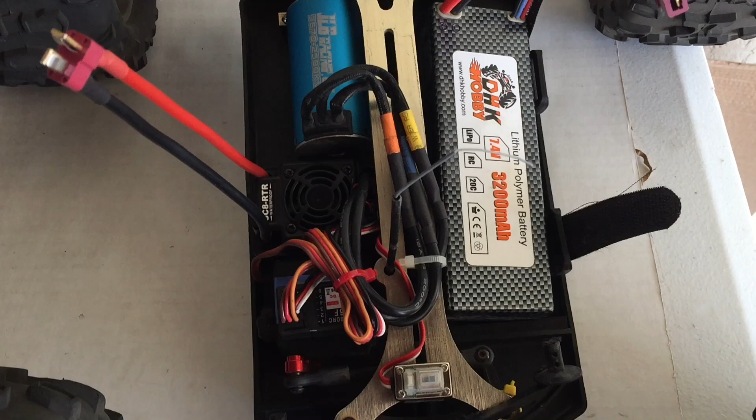So in my previous video I showed you guys how to calibrate and get started with the SC8 ready to run 120A ESC, and in today's video I'm going to show you guys how to reprogram it to your personal preference or the desired settings that you want.

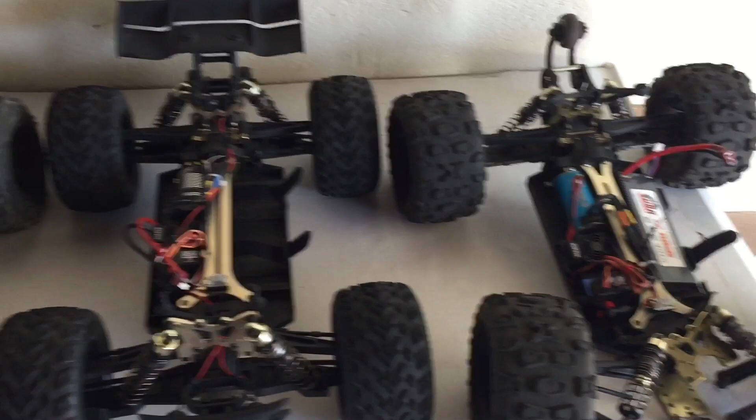Alright, so if you notice, all three of my trucks have the EZRUN SC8 ready to run 120A ESC. That one has it. I recently got one for the Generation 1. The DHK Maximus originally comes with it. That one's already reprogrammed, that one's already reprogrammed, and this one needs to be reprogrammed. So I'm going to show you guys how to do that, and I'm going to clear the table so we can just focus on that ESC right there.

Now the only time you don't need to recalibrate this is when you buy a ready to run kit. For example, you get the truck, the battery, the controller. The factory already calibrates it for you, so it falls under the term ready to run. But since you're getting this as a replacement part like I did, you're gonna have to calibrate it yourself. And if you guys want to know how to do that, check out my previous video. I show you just how to do that. So today's video we're gonna be reprogramming.

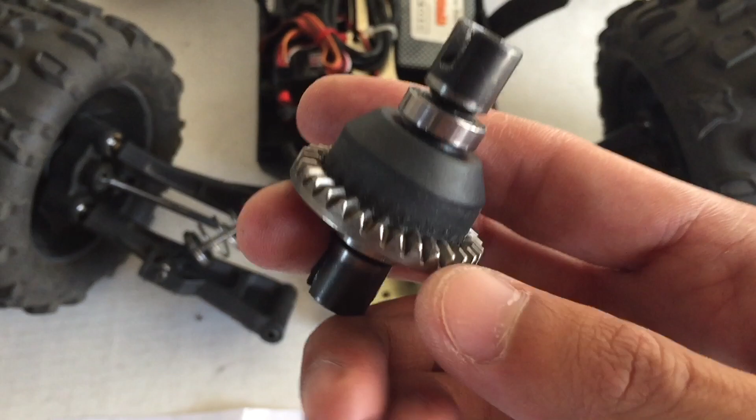And what's going on with my JLB Cheetah is that I'm getting a new front diff because the crown gear on here is really bad. Some of the teeth are grinded down really bad. Check that out. So this needs a new front diff, and also the pinion gear in the diff housing is also grinded down. If you notice there, the tooth comes all the way to the edge and it's basically eaten up. And also one of the bearings here popped.

It's supposed to have two bearings, so it started wobbling in the diff housing, making a bunch of crunching noise. And also the drive shaft cup is completely destroyed. So I'm getting this whole unit new. It should take about a month and a half to get here because of the whole COVID situation and how customs are handling their procedure. It's taking some time. So yeah, let's go on with reprogramming the ESC.

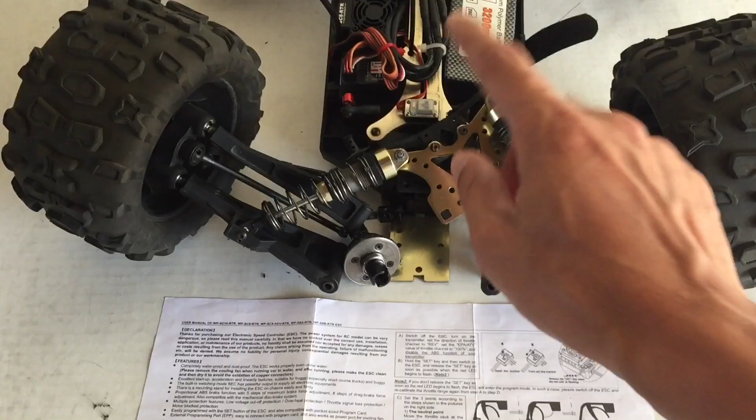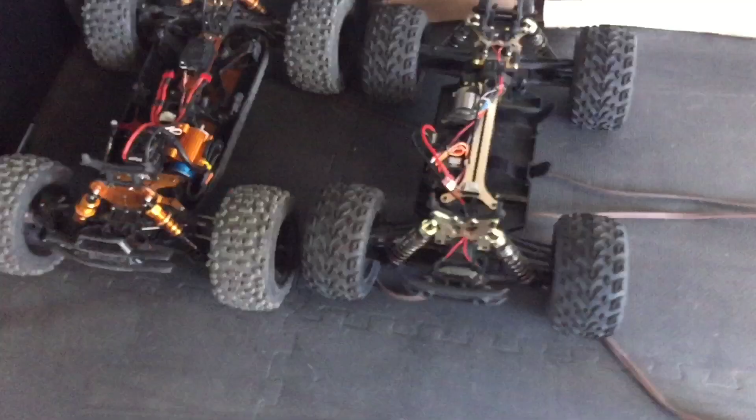Alright, so first things first, you want to learn a basic knowledge of what the spec sheet is trying to tell you. But I'm gonna explain to you guys to the best of my knowledge how I did it with those two trucks down there. I'll try to make it fast and easy. So these here are your categories. You have 5 categories: running mode, drag brake force, low voltage cutoff, punching power, and max brake force. The only two things that I'm gonna reprogram are low voltage cutoff and punching power. The rest I leave at factory settings because it's actually pretty good. I don't need to deal with it.

The most important thing is the low voltage cutoff. The factory setting is at 3.0 volts, which is good. And if you guys are new to the hobby and you don't know much about LiPo batteries, just know to never ever go below 3.0 volts, because if you do, there's a possibility that you might damage the battery, and once you plug it in the charger, it's not going to hold the charge. It'll just keep charging and charging, and then you're not going to get any juice in the battery because you went under 3.0 volts. So yeah, keep that in mind.

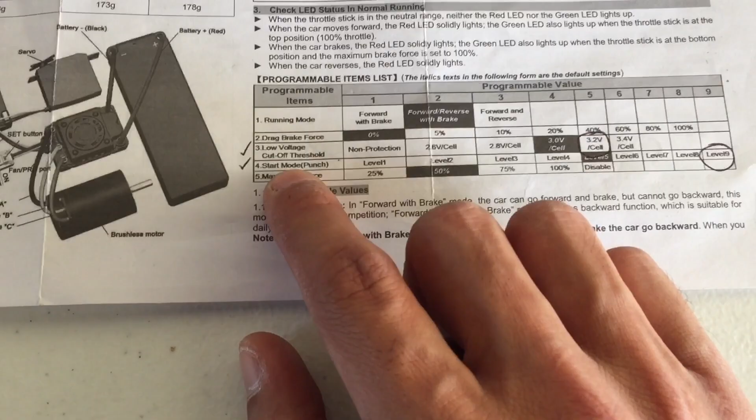So what I'm going to do is bring this up to 3.2 volts, and if you guys want to be extra safe, bring it up to 3.4 volts. And then my next programming will be punching power. This is something a lot of people have been asking me about, how to reprogram the punching power so they can have more power. And you know, more power is more fun, and more fun means you're gonna break stuff more. But anyways, I'm gonna do this all the way to max, and then the low voltage cutoff at 3.2. I've already checked and circled what I'm gonna do.

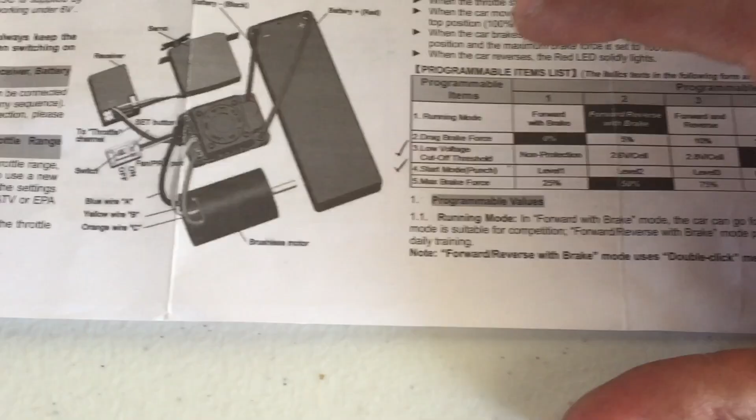The starting point of reprogramming, it's gonna do a bunch of green lights with beeping sounds synchronized to the green light. So category 1 would be 1 green light with 1 beep. Category 2 would be 2 green lights with 2 beeps, and then 3, and then 4, and so on. And then after you find your category, it's gonna make some beeping noise with red LED lights synchronized to that beeping noise. So for example, 1 green light with 1 beep is category 1, and then once you're in category 1, it's gonna make a beeping noise.

1 beep for column 1, 2 beeps for column 2, 3 beeps for column 3, 4 beeps for column 4. But since running mode only has 3 columns, it's gonna go back to column 1 when you pass column 3. So I'll use punching power, category 4 as an example.

So 1 beep, 2 beeps, 3 beeps, 4 beeps, and then when you get to 5, it's 1 long beep. And then when you get to 6, it's 1 long beep plus 1 short beep. So 5 plus 1 equals 6. And then 7 would be 1 long beep plus 2 short beeps. And then 8 would be 1 long beep plus 3 short beeps. And then 9, 1 long beep plus 4 short beeps.

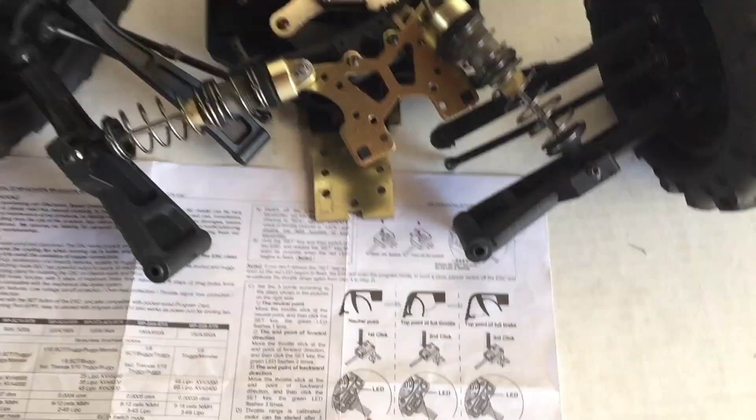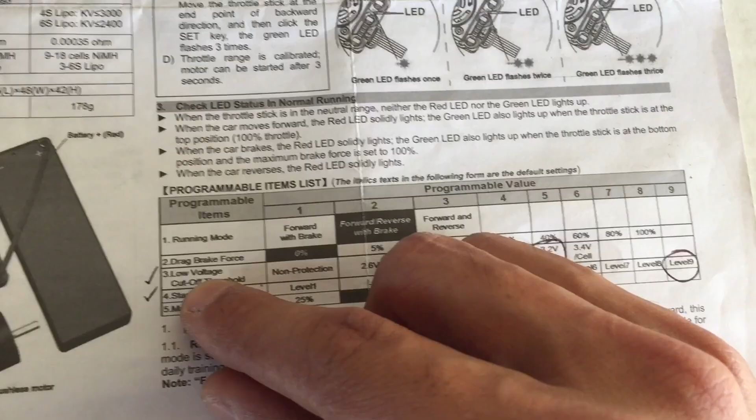Alright, so looking at the spec sheet, I want to change my low voltage cutoff to 3.2 volts. So I'm going to be listening for 1 long beep, and then at the start I'm going to be looking for 3 short green lights with 3 short beeps, indicating that I'm in category 3. And then to do that, you hold on to the programming button, and then you turn the car on, and then you keep the programming button held. It's gonna make a bunch of red flashes and beeping noise, but after that it's gonna start going into the categories, and I'll show you that right now.

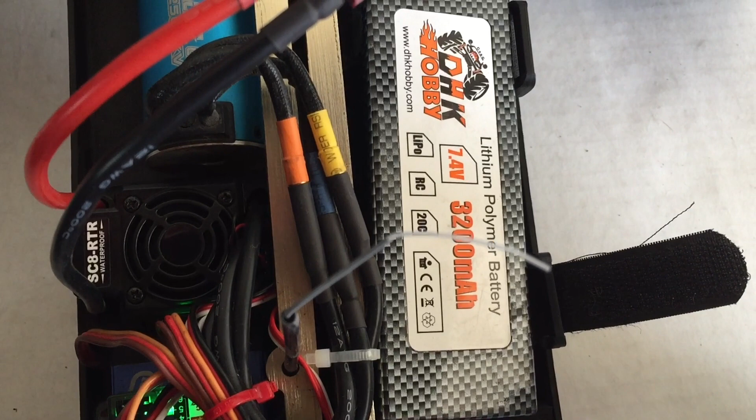So holding on the program button, turn the car on and keep it held. See a bunch of red flashes, and there's category 1, there's category 2, there's category 3, and then I let go of the button, and then it's making 4 beeps, indicating that it's in column 4. And then to get to column 5, which I want, I'm gonna push the program button 1 time, and there's that 1 long beep.

Alright? And then if you want to be extra safe and bring it up to 3.4 volts as your low voltage cutoff, push the button again. Now you'll hear 1 long beep following 1 short beep. That's 5 plus 1 to make 6. And then if I push it again, it's just 1 beep. So it goes back to column 1, push it again, 2 beeps, column 2, push it again,

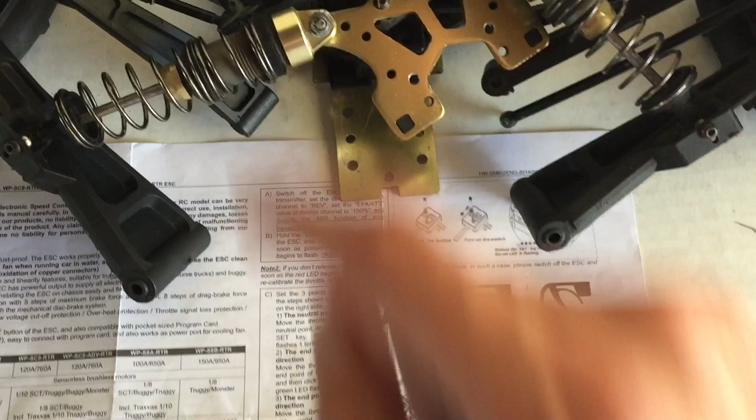3 beeps, column 3, push it again, 4 beeps, column 4, and I want this to be in column number 5, 3.2 volts. So I'll push it again, and there's that 1 long beep. Yep. And then once you're done and you want to save it into the ESC, just simply turn it off. So now I've successfully reprogrammed low voltage cutoff to 3.2 volts.

Next, I'm gonna do punching power. So I'm gonna look for 4 green lights or 4 flashes, and then I'm gonna let go of the button, and then I'm gonna listen for the beeps. I want this to be at maximum power. So I'm gonna want 1 long beep following 4 short beeps. So remember, column 5 will always be 1 long beep. Again, so 1 long beep following 4 short beeps will bring me to maximum level, which is level 9.

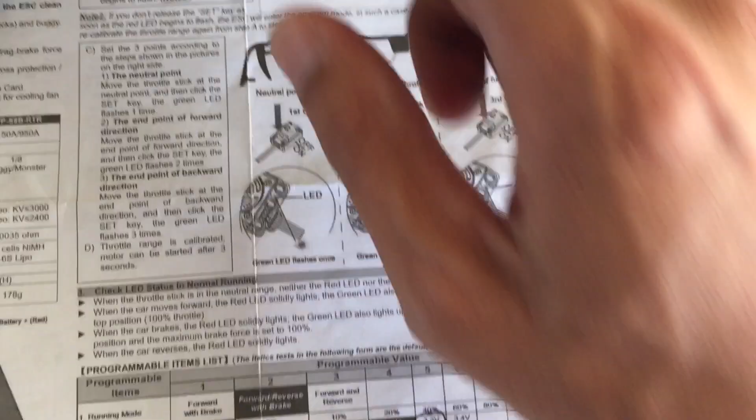So starting off, hold the programming button, turn it on, and wait for the category, which are the green lights. It's category 1. It's category 2. Category 3. Category 4, and then I let go of the button. So now I'm in category 4, and it's making 1 long beep indicating that it's at level 5. And then if I push it again, it's going to make 1 long beep following 1 short beep.

That's level 6. That's level 7. That's level 8. That's level 9. Oh yeah, maximum power. And then when you want to save it into the ESC, just turn the car off. So now I've successfully reprogrammed my punching power all the way to maximum.

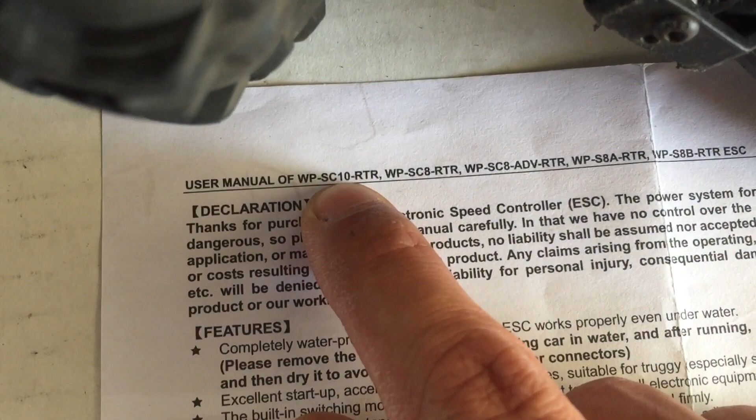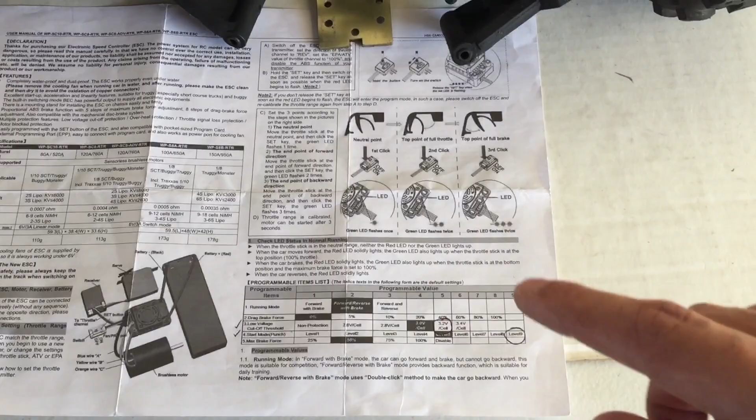So yeah, that's basically it, guys. This whole procedure that I'm showing you works with all of these models of ESC up here, the SC10, the SC8, SC8 Advanced, the S8A, and the S8B. I hope this helps with your reprogramming, since a lot of you guys have been asking me how to reprogram the ESC, how to reprogram low voltage cutoff and punching power. So hopefully this gives you guys an idea on how to do it.

And remember, always have your radio on first before you do this, because you never know when this thing can go haywire, like the minute you turn it on. So yeah, let me show you guys the spec sheet one more time if you want to pause the video, take a close look at it. But yeah, that's basically it, guys.